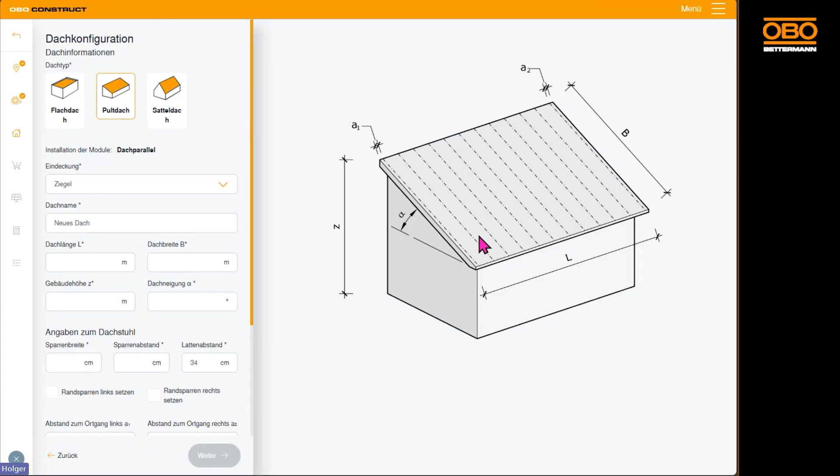For each roof type, there is a so-called visual sketch here that helps us to clearly identify and locate the corresponding input fields within the image, ensuring that I can accurately make the necessary entries. Let me provide an example for a flat roof. In the case of the flat roof example, I will select the cover type bitumen. Here, a friction coefficient is already taken into account by default.

For a flat roof, it is particularly important before installation to determine a friction coefficient using a testing procedure. For that purpose, we have a separate report available to ensure we can accurately create the protocol. The value that was determined through the inspection protocol is then entered right here. This means the statics will essentially have to be recalculated. In my case, I'll now take the standard value. I just want to do a quick planning session for now and can always go back and re-enter the value later if it turns out to be necessary for the statics.

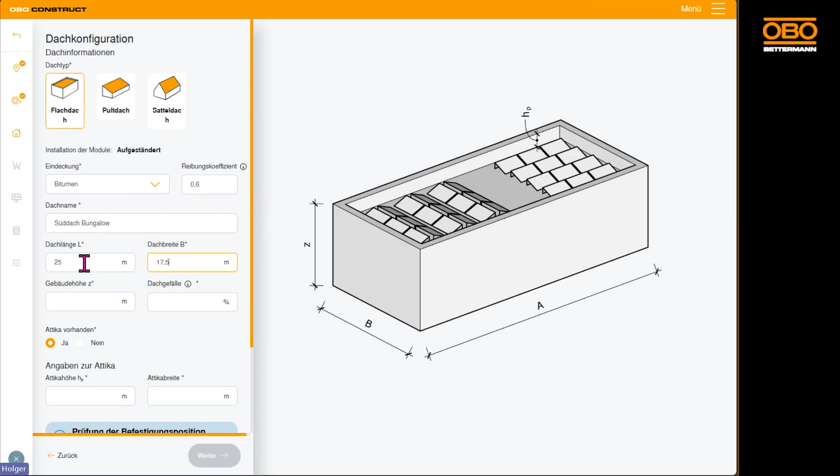The roof name can be selected separately. It has to be entered individually. That would now be South Roof Bungalow here. I've got a roof length of 25 meters, a roof width of 17.50 meters. The building itself stands 6 meters tall, and the slope has been adjusted to exactly 2 percent.

A parapet is present, though not in my case, but I can still enter it here if necessary. I can enter the height and width of the parapet here, and this information will then be taken into account in the next planning level. In the next step, the mounting systems are now available for selection. Here we have our Flat Basic system, where we can work directly on the roof using a flat rail, or our Flat Pro system, which allows us to work with a slight elevation, where the cable management systems could be installed beneath the PV array, providing a cleaner setup overall.

But today I'm going for the Magic PV Flat Basic. Let's now move on to the product selection. Here I need to once again confirm the selection. The pre-selection in the Flat Basic is planned here for ballast absorption with a mesh cable tray GRM 55 300 FT. However, I can also individually choose a different one now or later on. By going back, I can easily return to this menu and swap out the mesh cable tray if needed.

The barrier strip is an optional feature, designed to assist in neatly organizing and separating cables, which you could select in this menu. For mounting the universal clamps, the question is whether to choose black or silver ones. For a black line, I'd definitely opt for black clamps. If the PV system is neutral, then silver would also work well. The function is identical for both. Don't forget the earthing terminal, as it's crucial for the equipotential bonding, so that it can be integrated into the building.

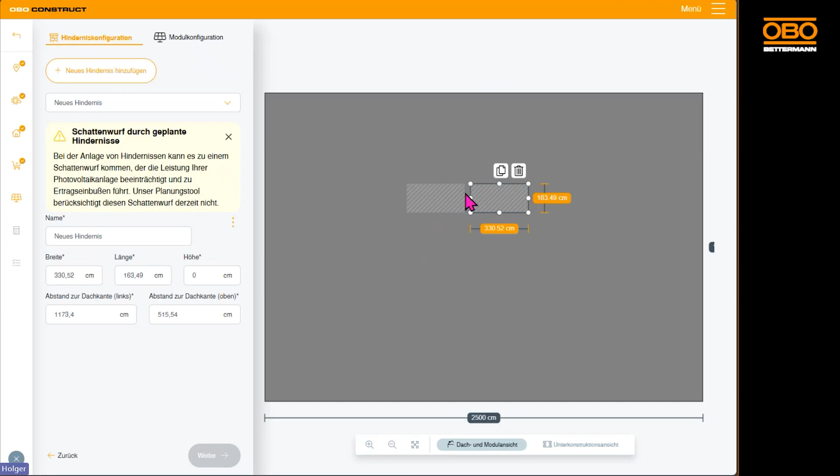The next step is now to define the obstacles or the interference areas. When I click on Add New Obstacle, a small box appears up here. I can move it around by dragging and dropping with the mouse, resize it, make it bigger or smaller. I can also copy it multiple times. Let me give you an example here. Let's say we're designing a skylight for the roof.

And let's name this window number 1. That I can then copy and place anew. That would then be window 2. And this up here, let's take that as the air conditioner.

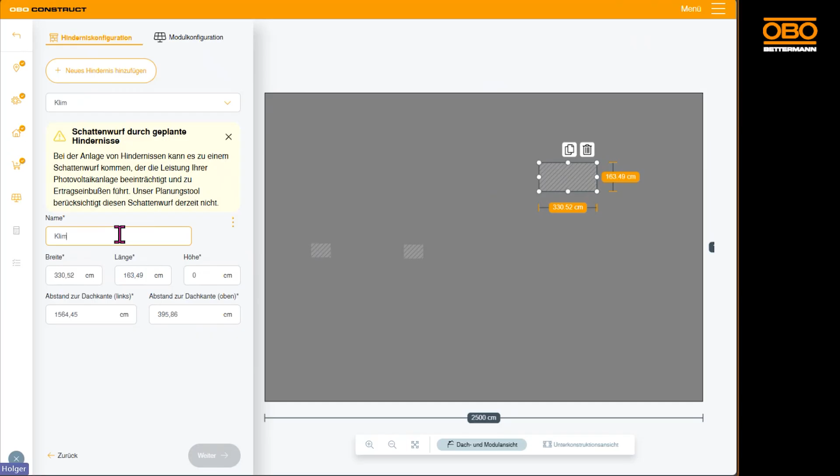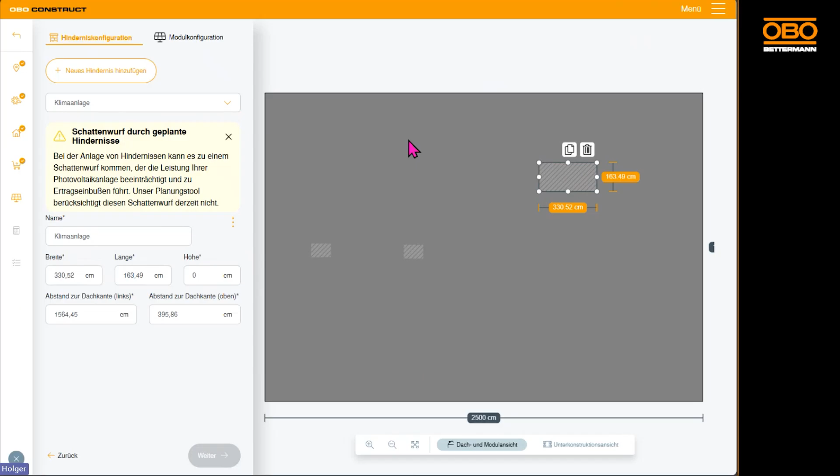Here's a concise list of my 3 primary challenges or areas of difficulty, and I could now take the opportunity to dive straight into the obstacle itself to continue addressing and working through it in greater detail. Other disruptive areas or maintenance pathways can, of course, also be positioned accordingly. That would essentially be the same use of an interfering surface, which I would then place in the exact location where it is required.

You can see here that the continue button is not yet orange. It's still grayed out. We're here in this step. It's still not finished. That was just the obstacle configuration for now. The next step would be to select this option here at the top, specifically the mounting for the modules.

We have a database here that we are now opening, containing 45,000 modules and manufacturers, and we can enter a partial term here at the top using a kind of wildcard search, which will then display the corresponding results in the search up here, showing the relevant matches instantly.

By highlighting this pin in orange, I can mark a module as a favorite, and these favorites are then, let me show it once more, also accessible within the standard search results. I've already marked quite a few here, and they're always displayed at the top of the search results. When I use the planning tool more frequently, I have my 4 or 5 favorites that are consistently pinned at the very top. I would now select my Tiger Pro from my favorites list.

And by confirming the selection, the OBO Construct will now extend across the entire roof as far as possible, including setback. So considering roof clearances and obstacle distances, the module field will now arrange itself to be displayed at its maximum possible capacity. I can, of course, also manually adjust this, or even change the orientation. Currently, it is always initiated in the east-west orientation by default.

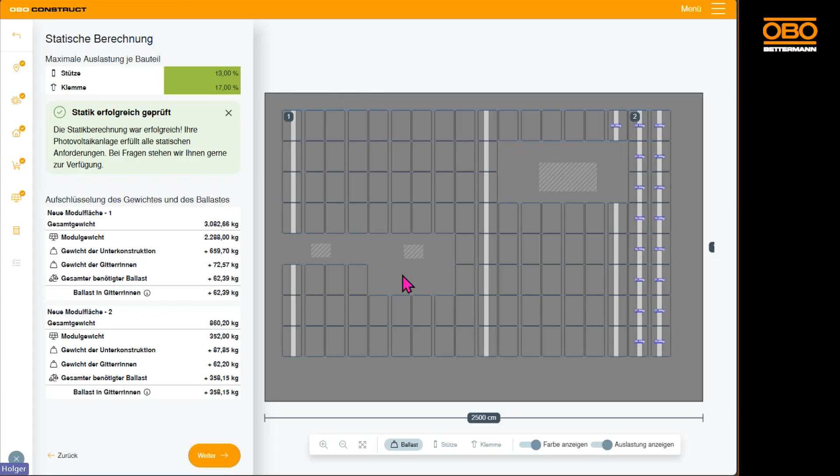And I'll repeat it in east-west orientation. The small field tends to be less efficient in terms of ballast distribution because the interconnected components in a large field system are better positioned for distributing the loads. And that's exactly what we'll now proceed to in the next step, where we'll observe how the static analysis is being calculated for this specific setup. And here we now see the static report or the summary report.

And you can see that this small section, section 2, would need to carry a relatively high load because it is naturally being evaluated independently as well. This means it has to handle the weight on its own. The entire load-bearing structure is the roof itself, but since its span exceeds 20 meters, it must be separated in this particular section here. Accordingly, this small section is depicted, quote unquote, as slightly less favorable due to its structural constraints. Then I can correct it again if I wish to.

Otherwise, I'll receive here all the detailed partial information for module field 1. This is area 1, the large field where we can observe these gray stripes right here. These are the grid channels I've chosen, the mesh cable tray, GRM 55 300 in this case. And here we can see that the large field would only need to be ballasted at this one corner. Otherwise, the grid trough is entirely sufficient to provide additional structural rigidity to the entire system.

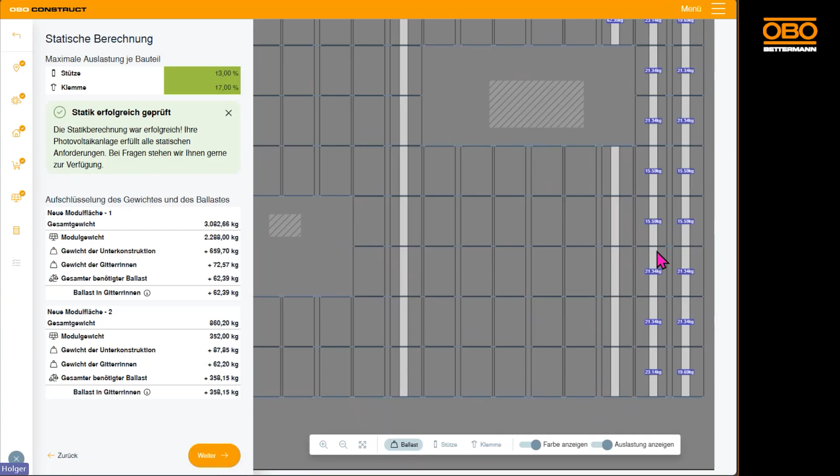And the dead load, including the modules, is entirely sufficient to counteract any potential shifting or uplift in this area. The smaller field is accordingly less favorable, requiring multiple instances of ballasting. To address this problem, I could revisit the earlier step and, for instance, reduce the size of the module field by roughly half. That might be a bit inconvenient, but I can always just copy it again later on. Roughly 2 equally sized fields. That means here I have 64 modules, and in this one I also have 64 modules.

East-west, by the way, is always laid out in pairs. I can also select these by clicking with the mouse cursor. Accordingly, the substructure is also calculated. In this case, I would probably now have an unfavorable representation again. But we'll see. I'll recalculate the statics.

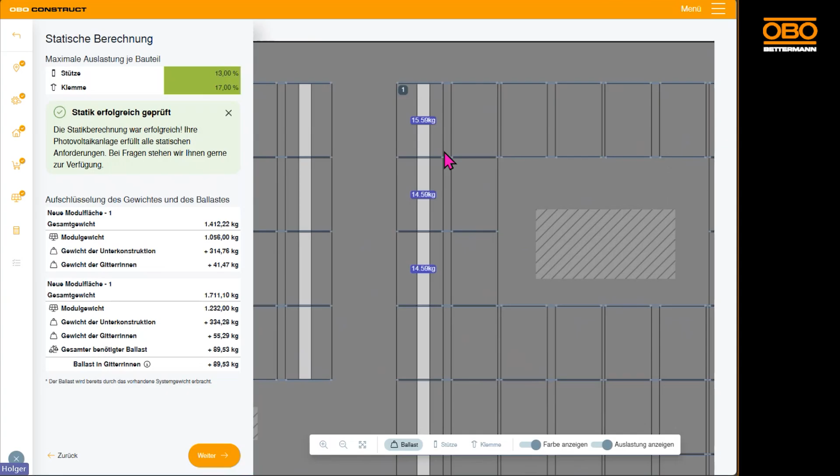Now, of course, I get 2 individual fields, relatively equal in size, and in this area, I now have the layout so favorable that the assisting surrounding components here are sufficient to manage the load effectively and efficiently without any additional support needed. To implement the corresponding countermeasures, specifically in the form of ballasting right here, to present it relatively cost-effectively, here I need relatively little weight due to the self-weight specification of the complete mounting system, including the module weights.

They are broken down again here on the left, how the entire total weight here is composed and broken down in detail. And I can now observe the same once again in the next step within the overall summary view. That means I have my selected products for module area 1 and 2, which are being separated into distinct sections. Here I have the required quantity, and then the corresponding order amounts that I can, of course, also place through the wholesaler as needed for the project.

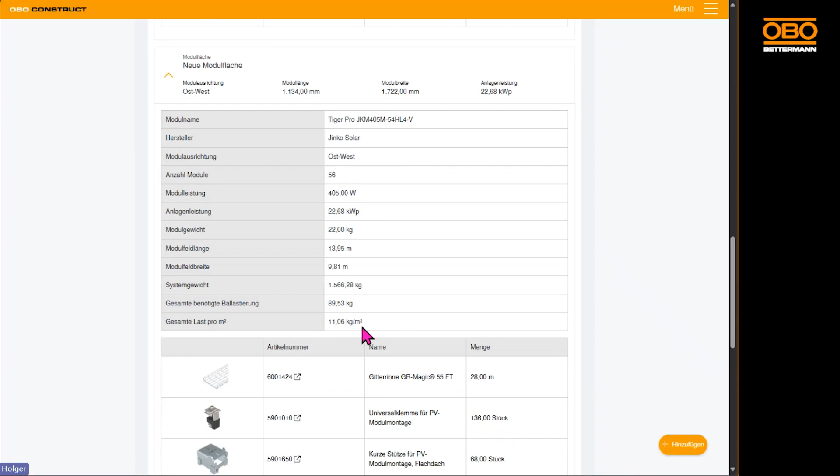Here, of course, the Tiger Pro module was used for both systems. I have 48 modules in the first module field. I have a total load per square meter of just under 11 kilos. Here, I can see again the individual items that are to be mounted on this field. And the second field looks quite similar. And here I naturally also have approximately 11 kilos per square meter, which then also ensures a very homogeneous distribution across the entire roof.

And here, it's highly likely that the possibility of non-installation is effectively ruled out. The whole thing still needs to be reviewed by the expert, as mentioned, or by the architect accordingly. This is simply a digital compilation we've put together here, essentially a material compilation for reference. We are putting everything together here again in what's called a project report. I can then download it accordingly, and it appears as follows.

The project here is displayed in green in this instance because the statics have been successfully passed and fully approved. We can proceed with the installation of the system, ensuring it meets the wind and snow load requirements for the specified areas here. Here is once again the detailed overview of the entire project, including the roof structure, the layout of the modules.

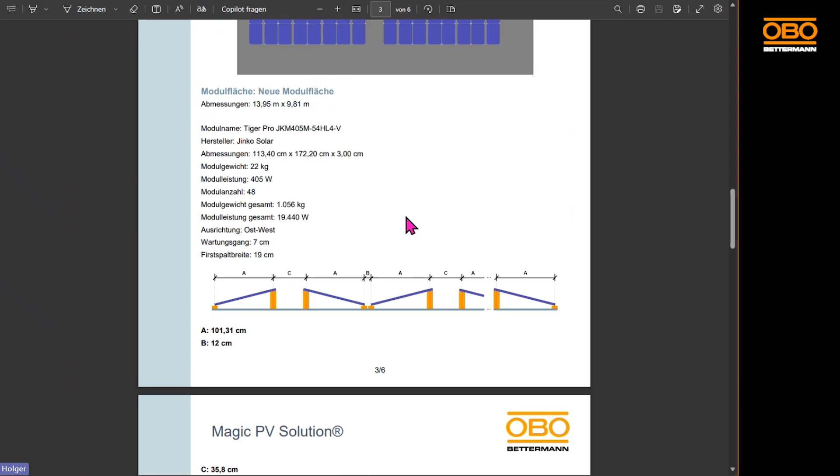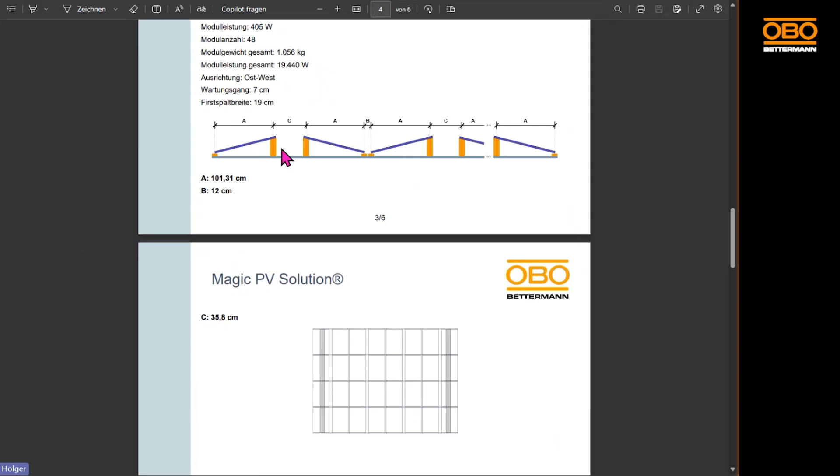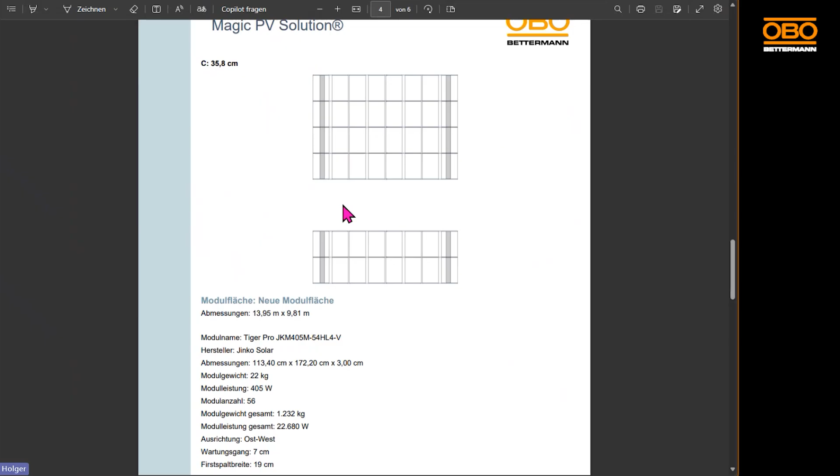Once again, here's the cross-sectional view for the installation of the elevated systems, allowing us to clearly identify and precisely reference the distances A, C, A, B in the detailed list provided below, so that we can assemble the small and large supports as per the specs here, ensuring everything fits together seamlessly and correctly. Additionally, we've also provided a brief overview of the substructure setup along with the detailed layout of the ballast system.

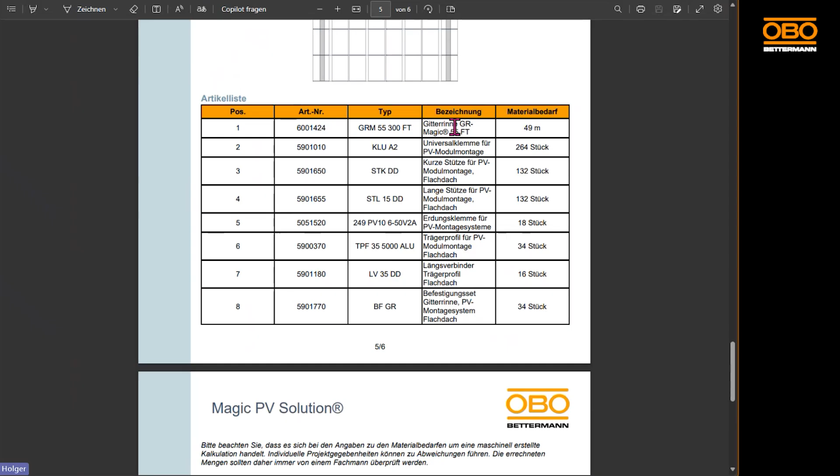The ballasting, which can then be read accordingly in the blue boxes provided, and of course, not to forget the material list, including our calculation fundamentals as well as our essential legal notes. I can then also send this directly to the wholesaler, forward it to the wholesaler, and proceed to order my materials.